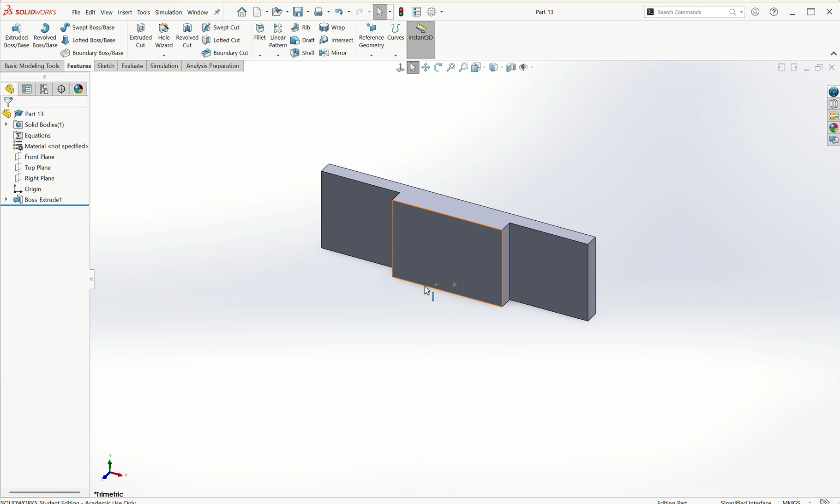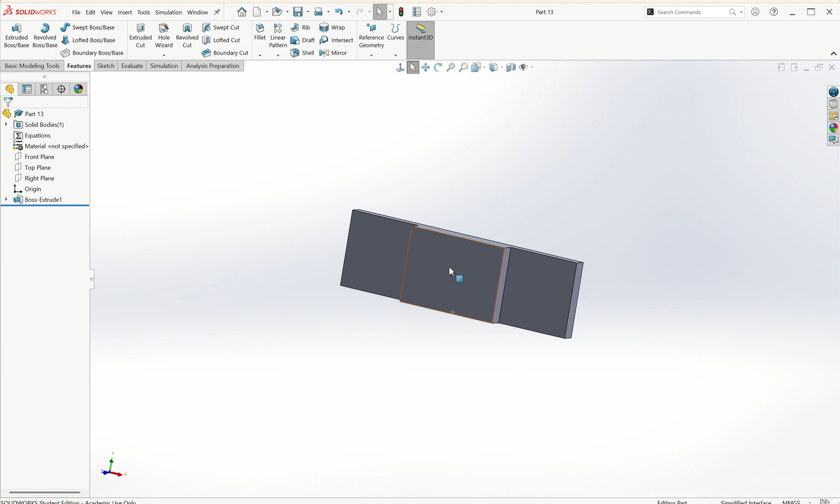Hey guys, so this is the next part of the OS CAD. It's very similar to the last part, just slightly smaller. So this is going to be sort of a double video. We're going to make the part and we are going to do another assembly of this part as well as the previous part. So yeah, let's get started.

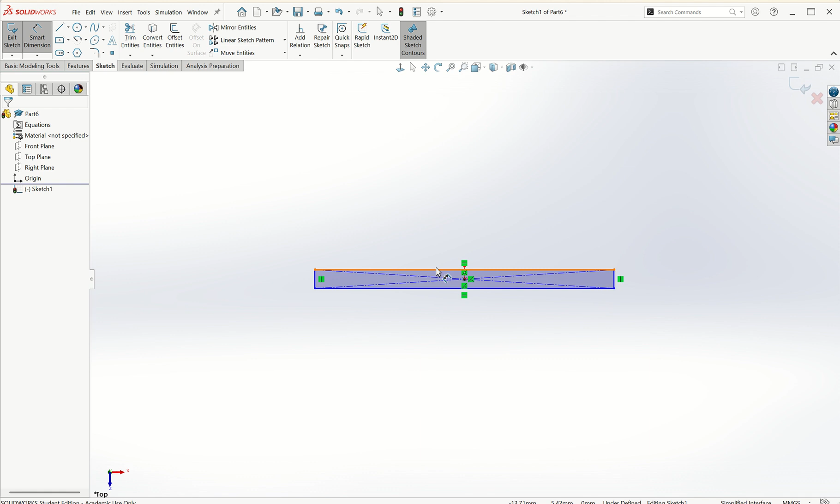So File, new part. Then you're going to go into Sketch again. We're going to do this off the top plane. Then you are going to draw yourself a rectangle, and then you're going to size it to be 70 by 18. Then off one end of it, you are going to make a box, and that box is going to be 50 by 9.

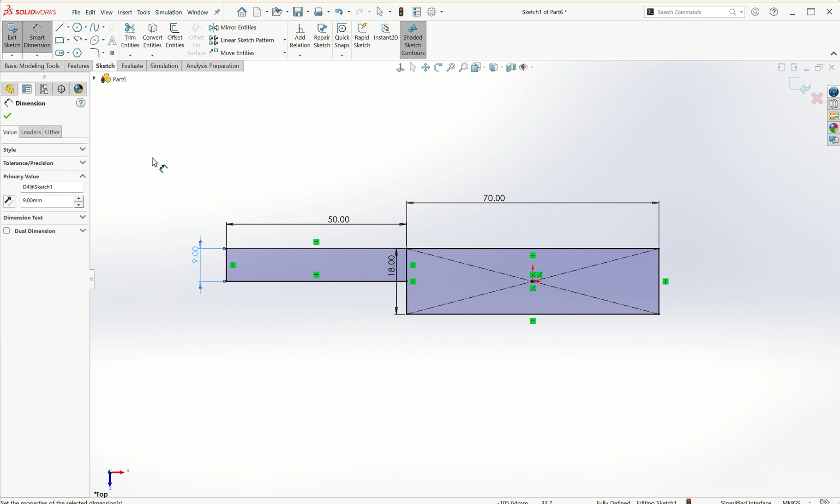Then, just like before, a center line from here through to here. Then you are going to mirror entities to mirror. You're going to click the square, mirror about that line there. Green tick. Then we're going to trim entities, get rid of a couple of lines we don't need anymore.

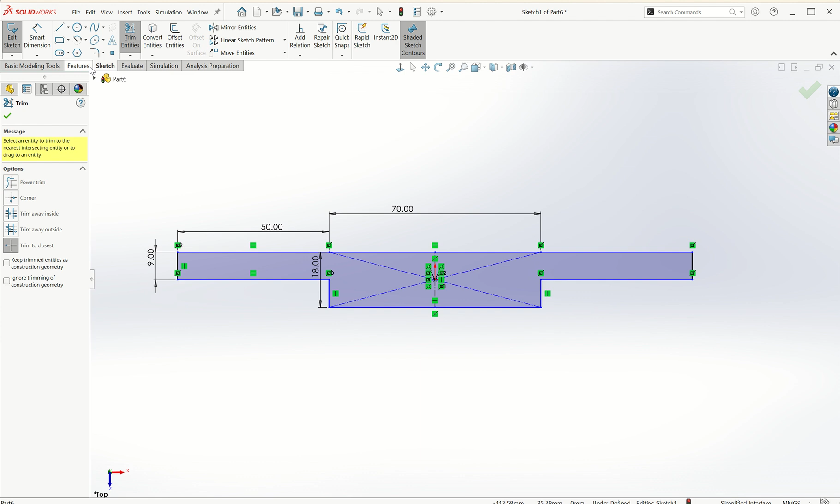Then we're going to go into our features, extrude boss base, and we are going to extrude it by 50. Then we're going to save, that's that part made. Make sure you save it in the correct place, and you're going to call it short side halving.

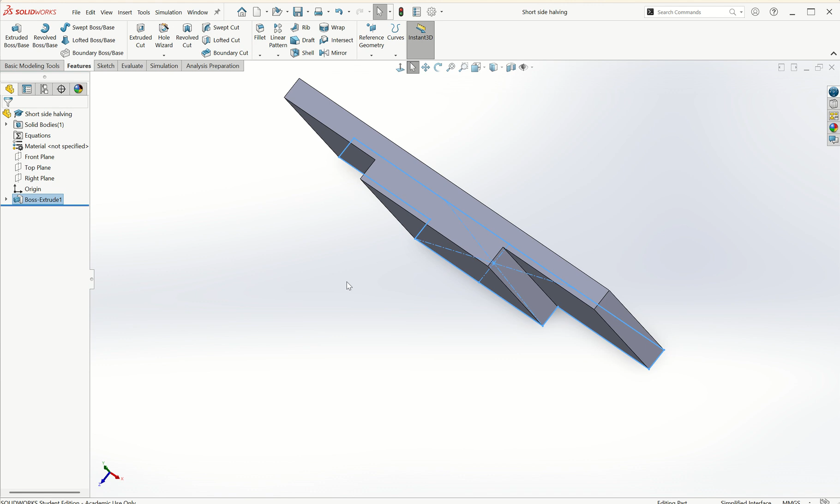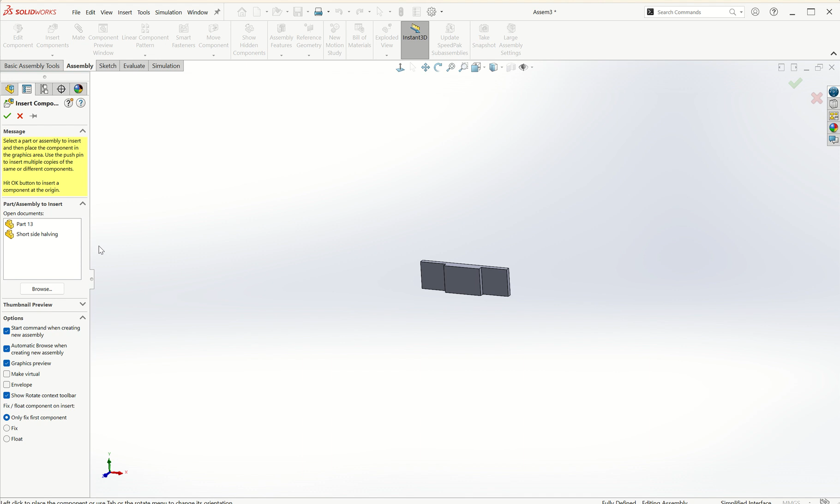So then we're going to go into File. We're going to create a new assembly. So we have our short side halving, so we're going to bring it in first. And then we are going to bring in our long side halving, or just side halving. So we'll look through for it. Side halving.

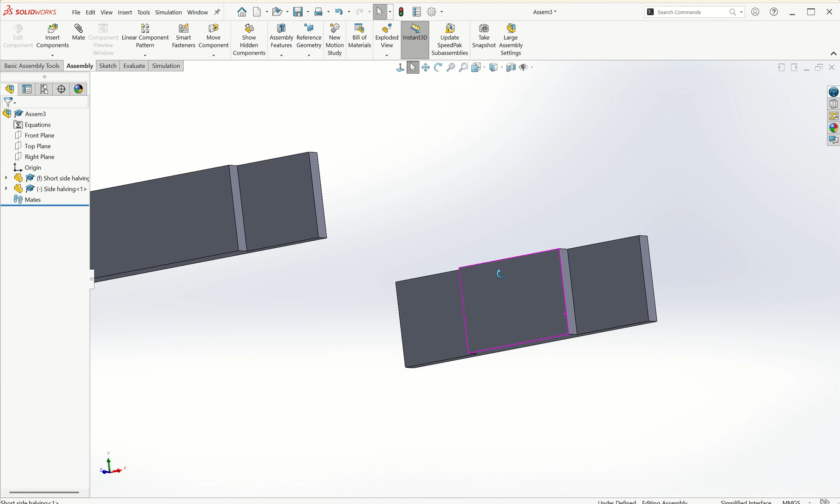Here we go. Again, this might be quite tricky depending on what direction they all come in, but if you follow my instructions, things should go okay. So first thing you'll notice is this sort of on its side. We sort of want it the opposite way about. So what we can do if this happens is we can click on this move component and we can rotate component. You can use a free drag, but the only problem with using a free drag is it's not that accurate.

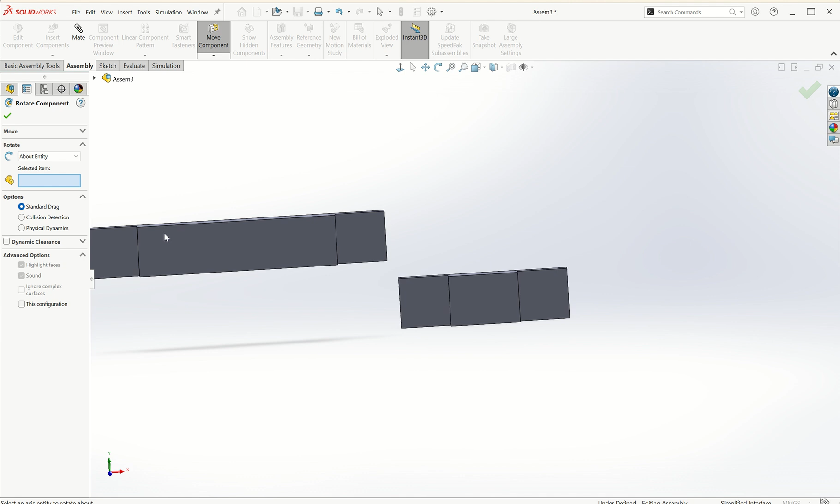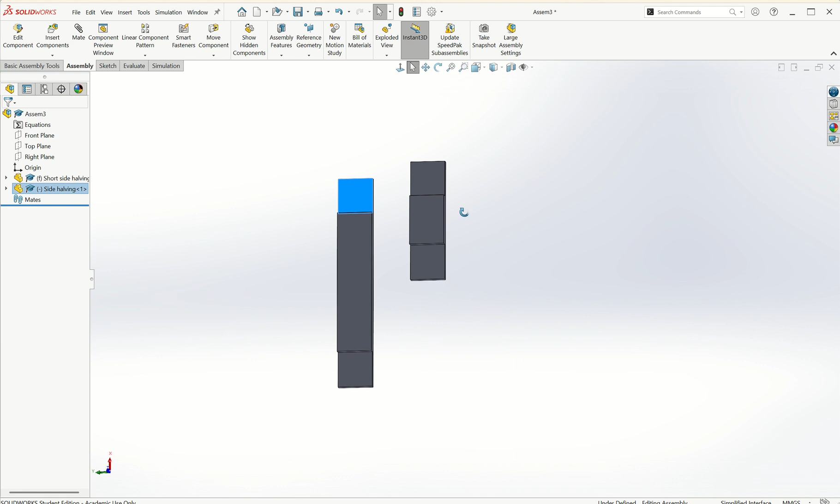About the entity tends to be how I would do it. Or because it's an assembly, we don't really need to worry about it too much. We can just sort of look at it from the other angle, especially when it comes to doing our working drawings, and that's probably the easiest. If you just pretend that it's on the side like that by rotating the screen, you sort of know that that's the orientation of it. But if it really is bothering you, just be aware that you can use that move and rotate component. The only problem with it is it's not that accurate, unless you are actually putting in how many degrees of movement and things you want it to move by.

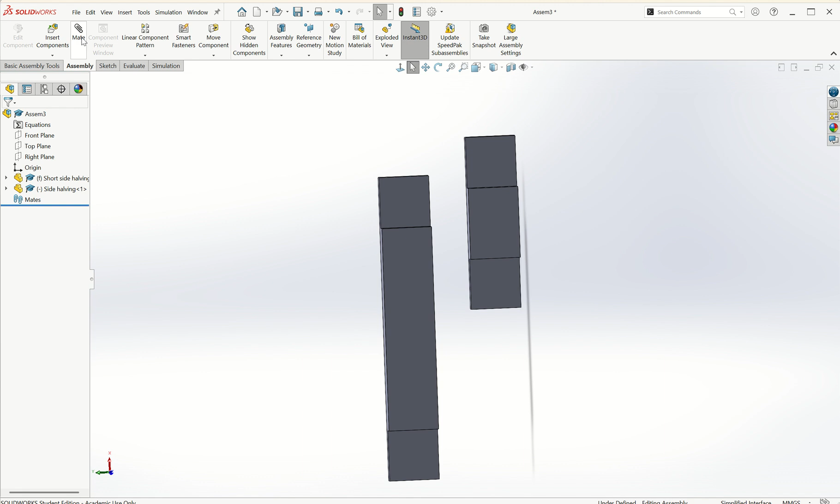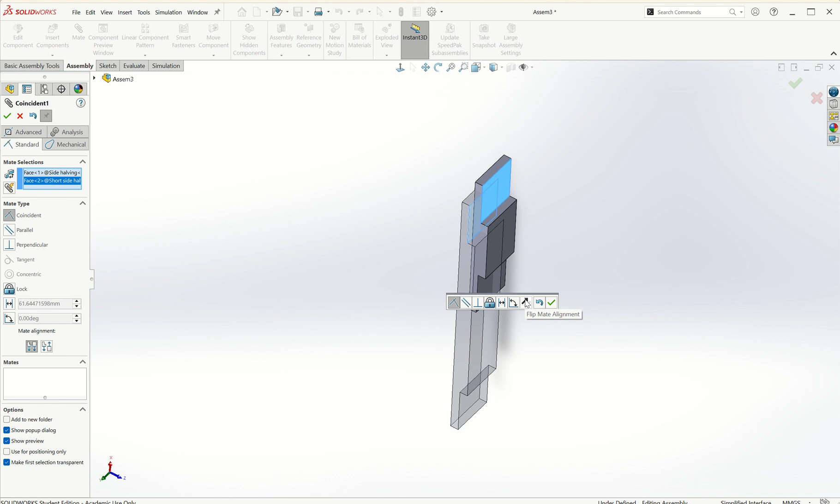So let's get started then on our actual mates. So the first mate, guys, is going to be nice and straightforward, and it's going to be this face and this face. Now you can see that they are touching, yes, but they are the wrong way about. So we want them to be touching with these both being inside faces. If that happens and you need to flip the direction of one of the components, it's just as simple as clicking this button here, flip mate alignment. It's the two arrows facing each other, and that puts it exactly where we want it.

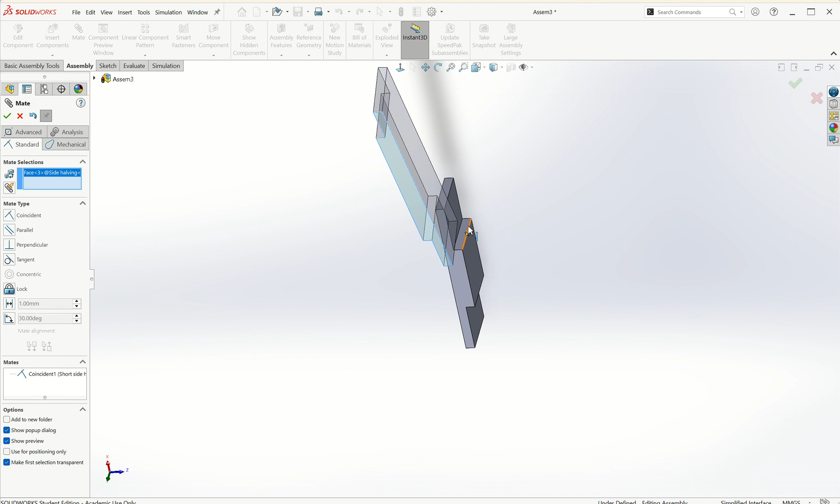Now it's done other things, of course, but we can sort of deal with these as they come. So that's the first mate, these two faces you want to be touching. The next mate is probably this face and this face, and that gets it more into the orientation we want. And the final mate would be this face and this face, and there you go. There's the first two parts mated.

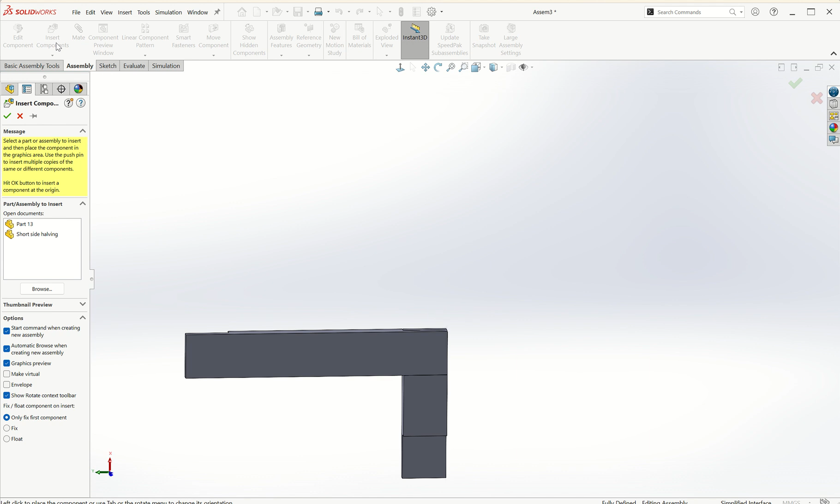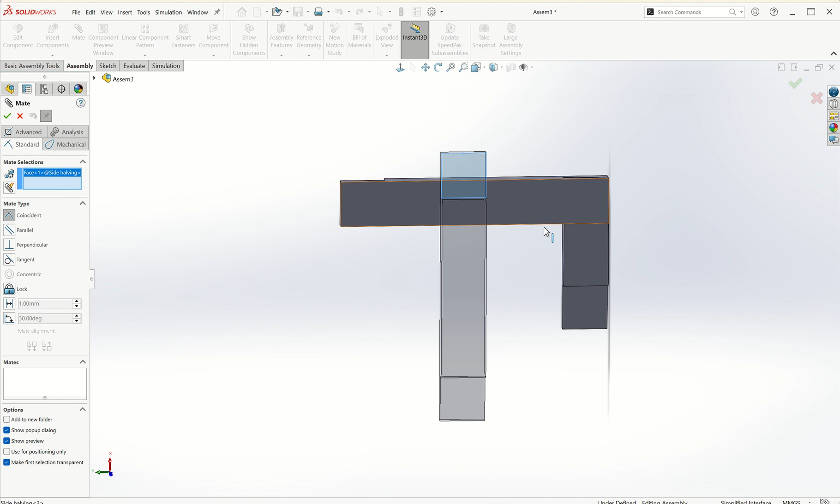We're just going to do that again. So we're going to go for another side halving, and we're going to get started on it. Just click it wherever it suits. We're going to click mate, coincident, and we want again this face and this face to be touching. Same issue as before, facing the wrong direction. We want both of them to be facing into each other. So flip mate alignment, and there we go. We'll have that in the right direction now.

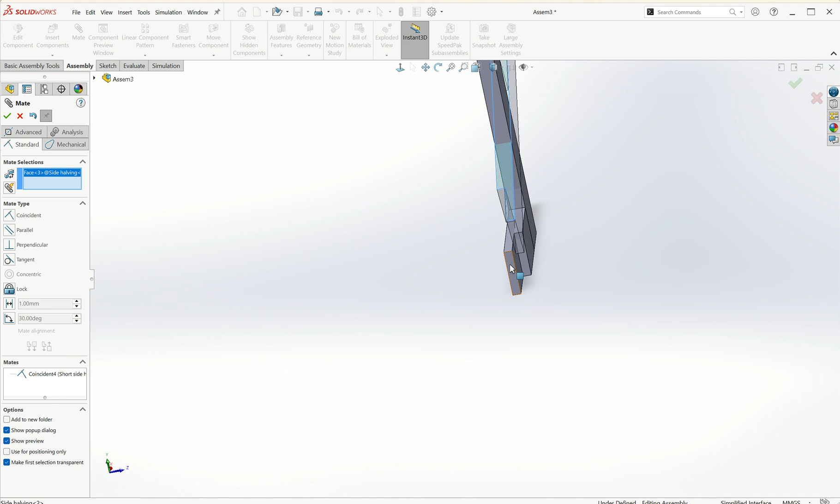Then this face and this face gets more in the right orientation altogether. And the final mate for these two parts would be those two faces. And just give it a wee shake, click on it and drag it, and we know that they're sitting in the right direction.

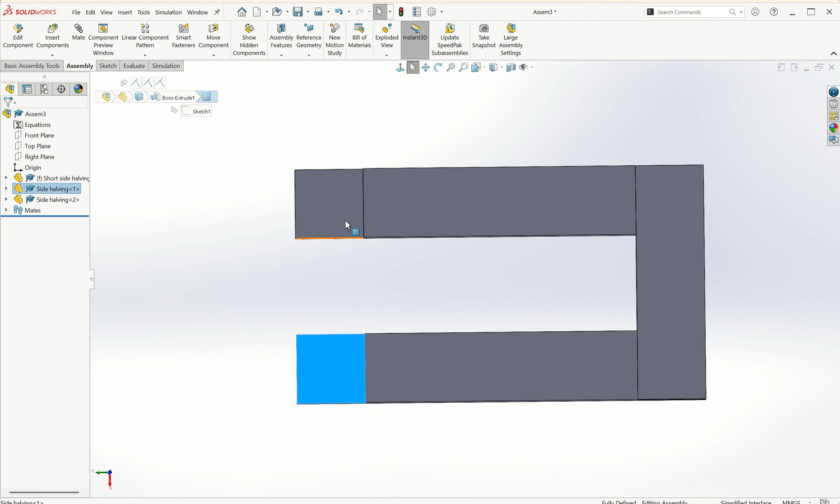So green tick. Last part we have to bring in another one of these short side halvings. Insert component. It happens to be here, but I'm just going to go about it the other way, and I'm going to look for it. Short side halving, double click, and there we go.

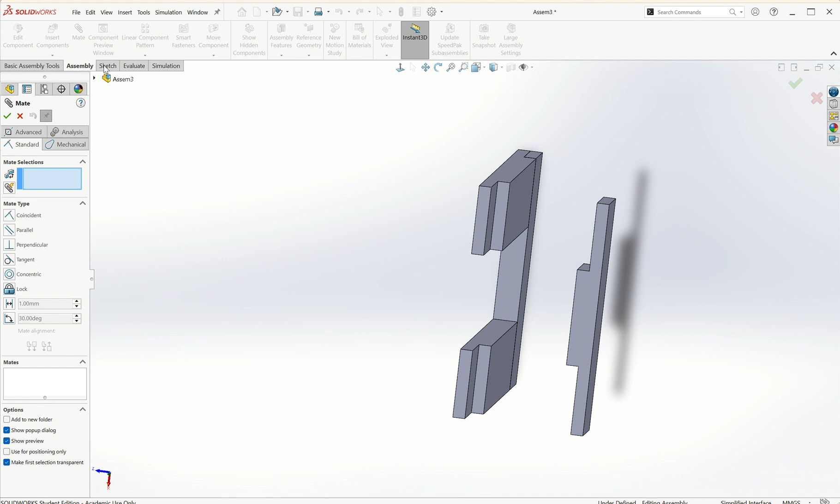All we have to do now is put a couple of mates on it, and that is that completed. So mate, coincident, first face is this one to this one. Next one will be this one to this one, and the final one will be this one and this one. And there we go. That is our second assembly complete.

So this assembly, file save, make sure you're saving it in the right place, and it is called the halving side assembly.

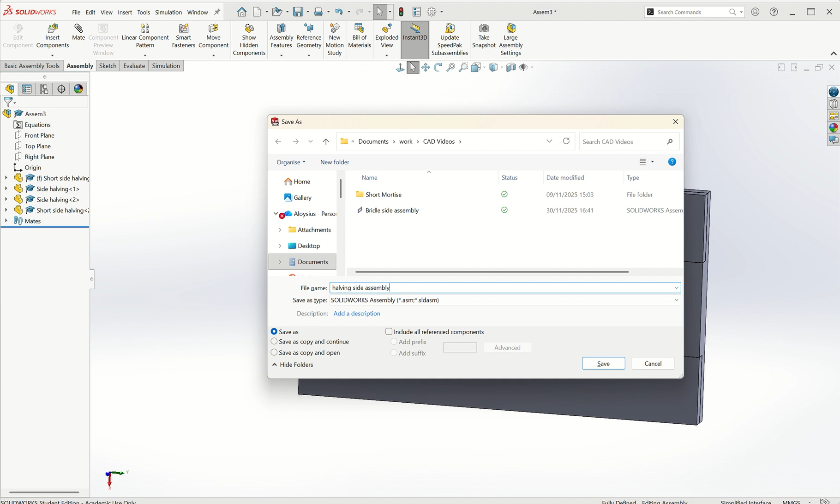It's as simple as that, guys. If you follow through and do as I say, you shouldn't have any issues with that, really. Believe it or not, that is sort of as complicated as it gets. The last thing we have to make is the door, and then we can start our assembly. Good luck.